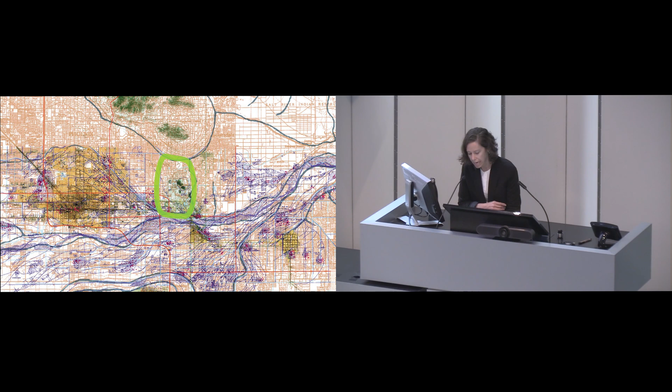So we took a look at what these words might mean. We really didn't want this to be our initials. We wanted to be something bigger, something that really talked about having a collaborative practice, which is what we believed in and what we still believe in completely.

So we found this amazing word, ma. It's a Japanese term, and of course one syllable, and yet it means an incredible concept. It's essentially the spatial idea of wabi-sabi.

So it's this idea of negative space or experiential space. It's kind of the counter to the formation of Rome, where you have obelisks that have created a city. Ed Bacon talks about that a lot. It's more like an Eastern idea where you have negative space, and moving through that negative space, or the space between, is what ma means. So again, a very complex idea in one syllable.

That is Japan, and we hope to make a pilgrimage there soon eventually. We haven't done it yet. But that's where Studio Ma comes from, because we are very concerned about negative space, experiential space, and it also happens to be somewhat feminine, which I also like.

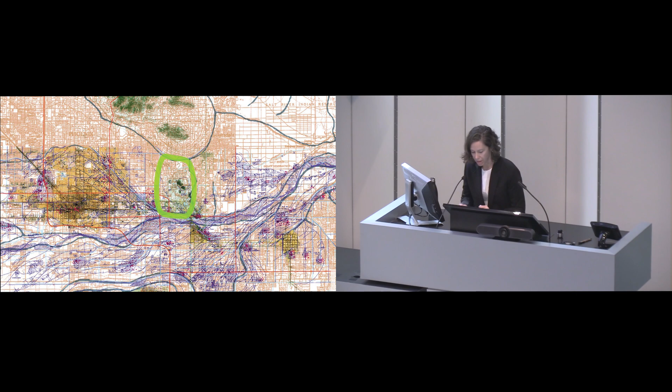So I want to give you a little bit of background about the project we did here. Some of these canals are used to this day as part of the modern conveyance of water. That inner loop connects three cities, and that's how we get our water. We created a trail out of these loops, and that was the design problem.

We quickly became inspired by the incredible adaptation of nature in the face of extreme heat and drought. We choose to live in Phoenix because we're deeply inspired by this place of extreme heat and drought, which honestly, a lot of places are going to be like Phoenix in the coming decades and centuries. Being here in the middle of drought and heat and urban concentration, but also resilience and regeneration, from water recycling strategies to inspiration from desert flora, gives us a really remarkable lens through which we see not only the rest of our practice, but the world.

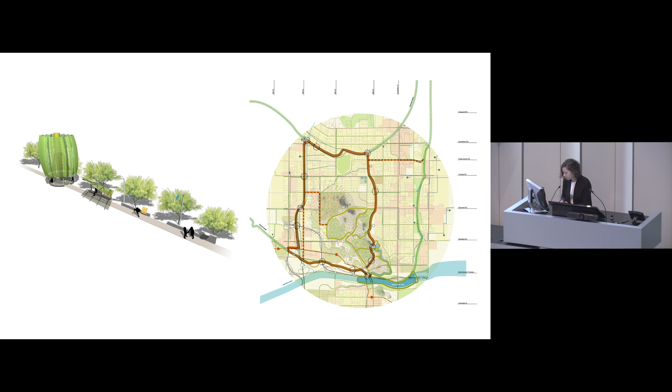And here's our studio, where it all happens. My philosophy is one of generosity and responsibility. I feel tremendously inspired by people and places in nature, and I believe we have an obligation as people living on this planet, and as architects, to act positively upon nature, to become an explicit part of a regenerative ecosystem instead of taking.

That belief has led us to develop a set of core values for how we approach design over the last 20 years. We formalized them in various ways, but briefly they are sustainability at any scale, leadership through partnership, and advocacy and value for all. This means we want to think about sustainability not only in terms of design, but construction, and that usually means doing a lot more with a lot less, and also always being aware of our impact on natural systems and ecologies.

We believe that architecture should be accessible to everyone, and so with every building we look for ways to engage and connect it with a wider public, even if it's a private or small semi-private structure. We believe that the best leadership comes not from one person taking charge, but from a deep partnership with experts in multiple fields. We learn from our clients, and they learn from us. We learn from each other, and we learn from scientists and engineers and other experts.

And most fundamental to our practice is an optimism. I'm sure you hear all about being optimistic, and people might tell you to be optimistic, and then you read the news, and well, it's difficult to be optimistic, so don't read the news.

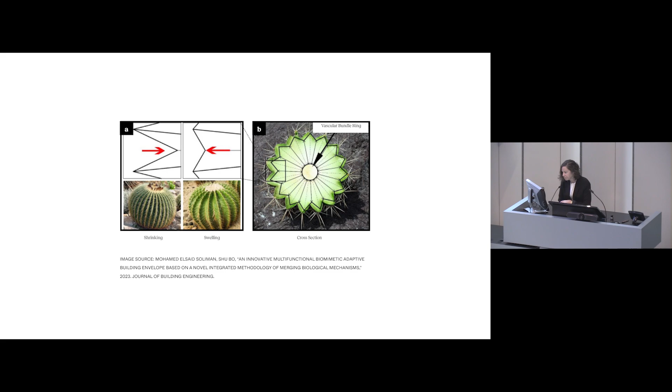We design the space to naturally ventilate for 7 to 8 months of the year, and to include a biome, a space between the enclosure of the building and the carbonized wood screen that's planted with low water and low light plants, stepping down the ambient temperature between the hot desert air and our indoor comfort zone. With our photovoltaics, it operates at nearly net zero energy. Our goal is to get to net positive energy and water.

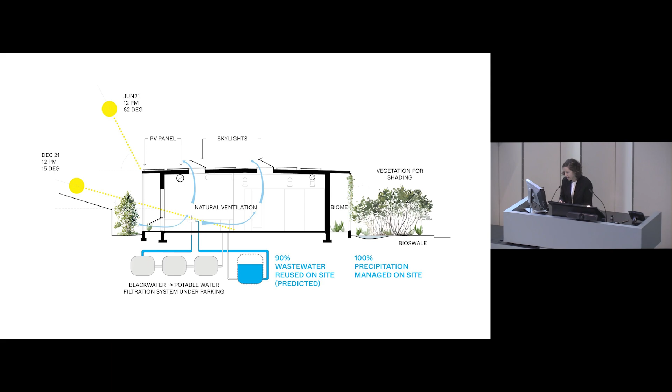It's definitely a journey, especially in the desert, and we quickly discovered the complexity of our water cycle in Phoenix. So we initially sought to have an on-site water recycling treatment that went from black water to potable, integrated into our facility, and we quickly learned that this wasn't helpful after we educated ourselves about what the actual water cycle is in our city. And this is it—you can see that one simple question, where does your water come from and where is it going, can lead to very complex answers.

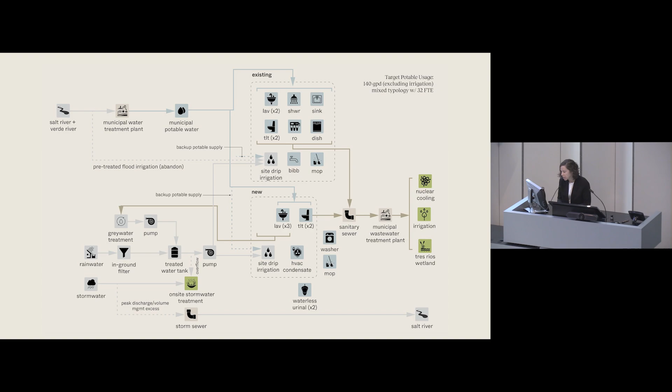For us in Phoenix, this involves that ancient canal system dating back 4,000 years in some parts, the geomorphology of the state of Arizona, and a wastewater treatment facility that's operated continuously since 1940 and provides all the cooling water needed for the only desert nuclear power plant in the US. So it's complicated, and the more we understand about these systems, the more we can educate ourselves and our clients to make more ecologically sound and positively impactful design decisions.

So we moved our office into this building in 2017 when we were working on a project for Arizona State University called Fusion on First, which I'll get to. I remember the first time we had someone in the office and the thrill we felt showing them how principles of shade and our desert biome, while simple, can be so effective.

By the time we moved into our office, we had finished several major projects, the first of which, ASU's Memorial Student Union—I won't spend too much time on it, but it was our first big project. We finished it from initial meeting through design and construction and completion in 164 days. Yes, 164 days. It was 100,000 square feet, over $50 million in today's construction dollars, and in a way, we were kind of ambulance chasers, more like fire truck chasers.

So the plaza you see on the left was what we were working on, and a terrible fire broke out in one of the rooms in the union—it was actually a smoker who was, I think, hanging out in the chair storage room, and I swear we had absolutely nothing to do with it.

But horrible fire. This is the center of all kinds of hubs of activity. 35,000 people go to this union every single day, and it needed to be put back and rebuilt as quickly as possible. It also had a host of code violations, including lacking about 50 feet in exiting width from assembly spaces on the second floor.

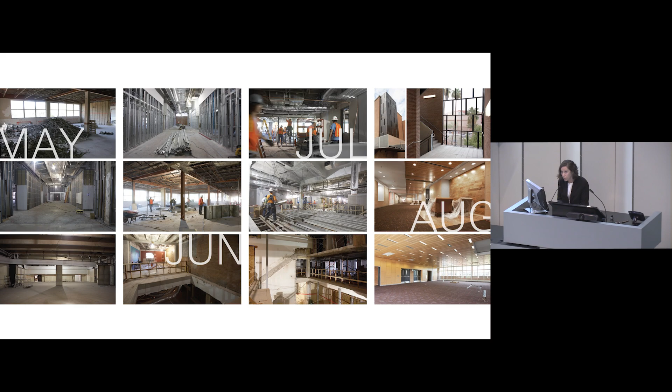And it set the tone for our office going forward. We're people who will work incredibly hard to get incredibly complicated things done. And we also care about joy.

I know that joy is a tricky topic, and particularly presently. It's hard in many ways to think about the role of architecture in creating joy. But if you think about buildings that are really incredible, and I was personally very influenced by the work of Sverre Fehn, whose Nordic Pavilion is, when Chris and I studied in Norway, this is what this is, and they

And getting to that joyful end product isn't always going to be joyful on the way. Getting your designs to be constructed properly is very hard. Reaching consensus can get tricky. Figuring out how to ameliorate existing social inequities is very difficult.

But we're committed to approaching architecture through the lens of ultimately creating something joyful. And this challenge excites us. And honestly, when you have a purpose and you have your why, hard work is joyful.

At NAU, Northern Arizona University, or as they like to call it, Native American University, for instance, we partnered with a Pueblo planner, Ted Jojola, to engage students from 64 Native American tribes so that we could learn about the difficult, complicated, and yet still joyful and resilient history of Native Americans, to see how our student center could actually improve their existing experiences on campus.

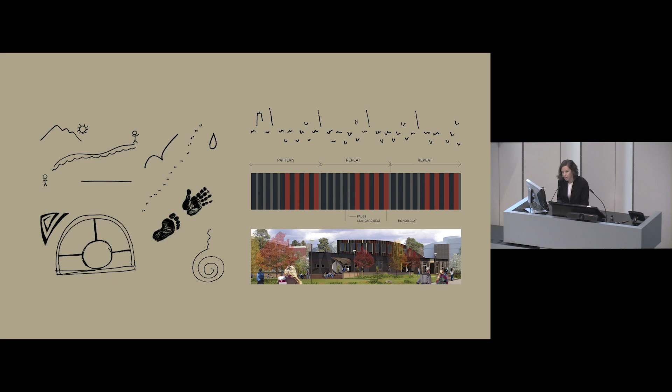And these students, we went through charrettes, and they told us about their stories. It was actually all around this idea of migration, beautiful stories, difficult stories, visual stories. And these students were often culturally alienated and removed from their community on campus and their cultural practices.

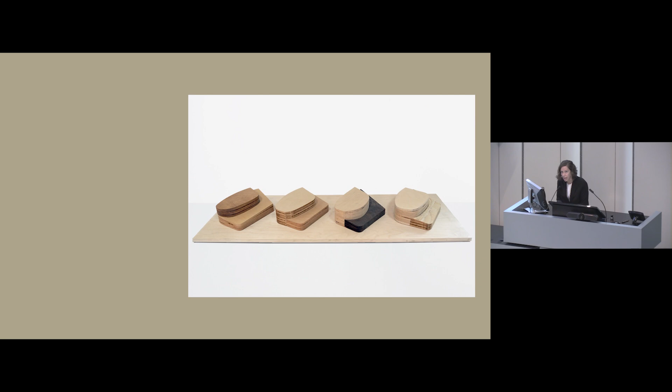So together, we designed and co-designed with them a center that they feel is completely theirs, 64 different tribes who feel like this is their space. And we believe that every building should improve what's already there.

We've also created consensus at big institutions like Princeton University. And there we designed a graduate student housing to help them build community and feel more connected to each other and the campus, which came from a lot of thinking about groups of people, in this case graduate students, who are not simple, homogeneous groups, but it's a community of people with very different needs.

There are families, there are couples, there are people who have actual mobility, there are people who do not have mobility. There are all kinds of different people in that group of graduate students. And we designed a place where all groups of these students could find a place to belong and find community together, regardless of their stage in life and family situation.

Places to cook, places to convene, places to belong together. And in this process, we also restored the natural flows of water from campus to its wetlands and lake.

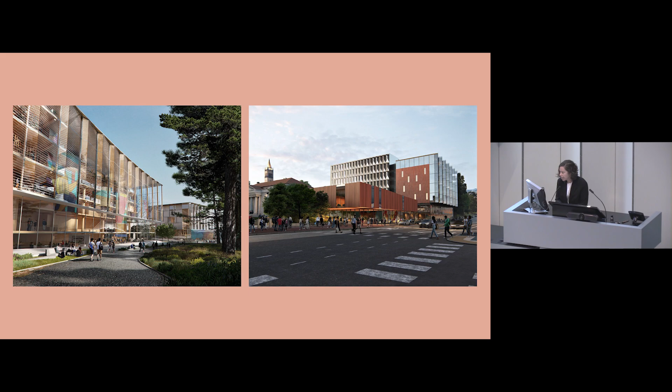At UC Berkeley, we're working on a huge student life and space equity plan that seeks to redistribute resources to meet the needs of diverse students, and that creates a place where students can convene, create community, and have a home base on an expanding campus.

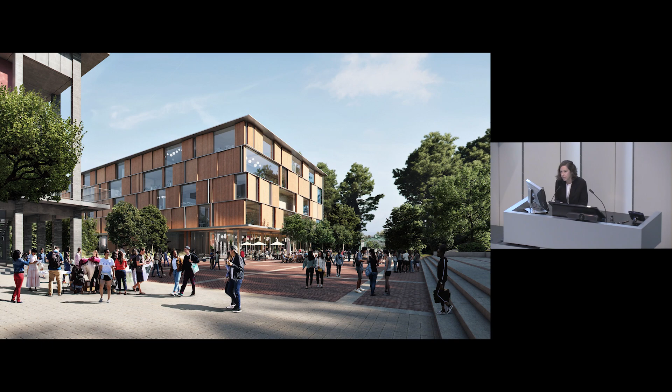And we share with our clients and partners a sense of optimism, this idea that you can actually have institutional visions that include everyone at the table.

This project in particular, which was run by their university architect, while they did a master plan, they acknowledged that a lot of people weren't at the table. And so this plan arose out of that, and the idea that they could meet with all of the different people, especially those that are student-facing, and students themselves, to make sure that this plan reflected their needs.

So this is the work we do, and we really provide people with a sense of optimism and reassurance, which we hope brings them joy. And now to those questions and lessons that we've learned from the desert that I promised.

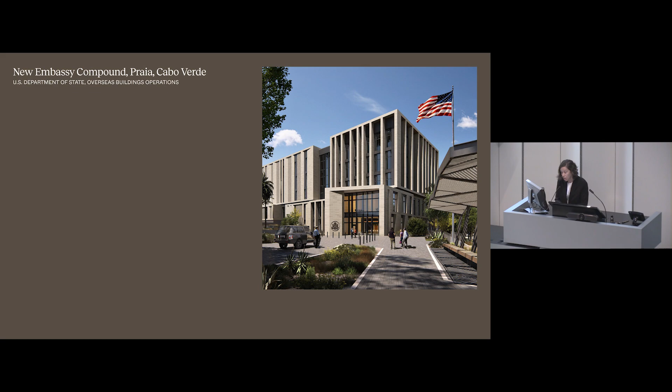So where does water come from and where is it going? This is our new embassy compound in Praia, Cabo Verde. This is the project where we heard about Cesaria and learned about the quintal. It also asked us to think about water in a way we'd never thought about before.

99% of the time, Praia is in a drought state. The city is on the leeward side of the chain of islands that make up Cabo Verde, and it's very, very dry. That dryness is something we're used to working with in Phoenix, and it's probably one of the reasons we were selected for the project.

A dry climate sets up a certain architectural approach. We need to think about how to make the most out of every drop of water. That means here in Praia, fully recycling all of our wastewater. We use every drop of condensate produced by the building's mechanical systems, which, although we're in a temperate climate, we need due to necessary security issues.

But here's where it gets sticky. Once a year, it floods in Praia. And so we found ourselves designing for these two polar extremes: total drought and epic flood.

The new embassy compound, or NEC as it's called — there are a lot of acronyms in the State Department — is sited in a neighborhood known as Várzea, or floodplain, which meant we needed to design for extreme heat and drought, a highly corrosive marine environment, and the potentially intrusive presence of floodwater.

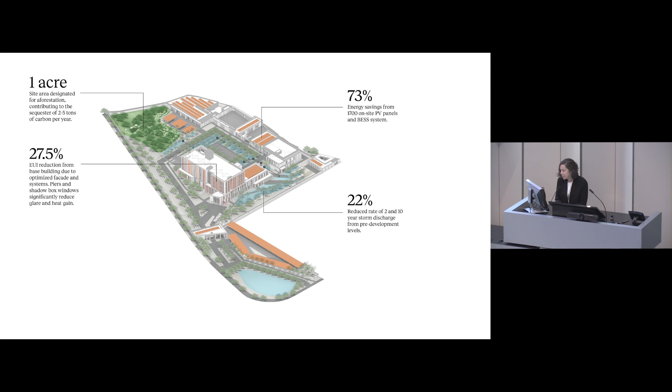So we designed the entire site around the central quintal gathering space, using this space and the sequence of spaces around it to slow down, convey, and collect water across the site, which includes more than 20 meters of grade change from its highest point in the upper left-hand corner to its lowest point on the bottom right. It became essential to the design.

All of the buildings that make up the embassy are related volumes organized in plan around this quintal space. The open end of the quintal is actually a place where nature engages with it.

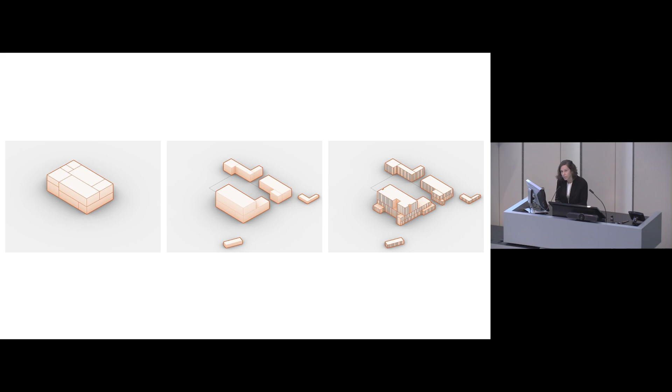The volumes are also stacked like stones of varying depths and heights vertically around this quintal, adjusting in height depending on the program and context. One of the things we heard when we interviewed local staff was about what made Cabo Verde feel like Cabo Verde, and they talked about stone quite a lot — in particular basalt and also a light, white stone. The two stones in combination really identified a place as Cabo Verdean.

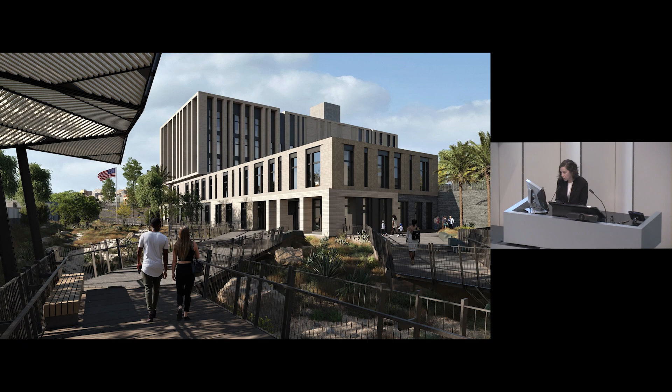Some of these volumes, like at this entrance where the public comes to get their visas, are scaled to address the adjacent residential neighborhoods. But as you move through into the lower areas of the embassy, the volumes begin stacking, and the ground plane is designed to completely flood.

You can see here the Quintal volume, made of basalt, on the right-hand side, which is 5 meters above this entry area. So you emerge up to this Quintal space.

This whole ground plane is designed to flood, as I mentioned. The walkways are designed like docks to anticipate this event. The areas highest in elevation are reforested to slow down the progression of floodwater to the Quintal.

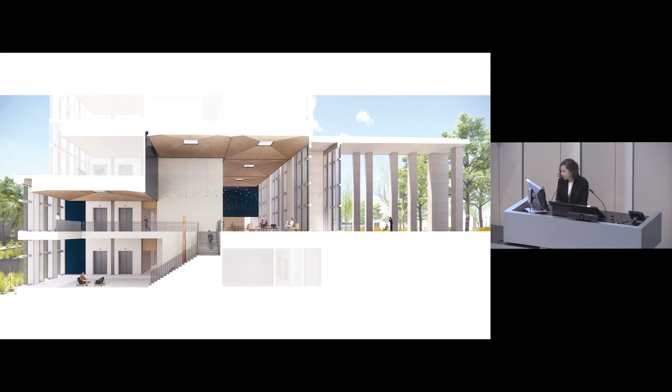The main embassy building connects the lower flooding areas of the site to the elevation of the Quintal, 5 meters above the lower entrances. The Quintal expresses itself as a basalt volume in the main public gallery of the embassy through a stair and a double height space, linking the diplomatic public spaces to the shaded outdoor spaces. This is a view from the reforested area of the site to the Quintal.

From the outset, the idea of this Quintal was a place to gather and make music, and we had these ideas of inspiration around music alongside the climatological challenges involved in designing this central space. We wanted to express the musical traditions of Cabo Verde directly into the fabric of the facade, and ended up taking inspiration from the syncopation of the Cabo Verdean batuque beat.

This is a music of liberation performed traditionally by women, and also Madonna. There's a version, you should check it out, it's very good.

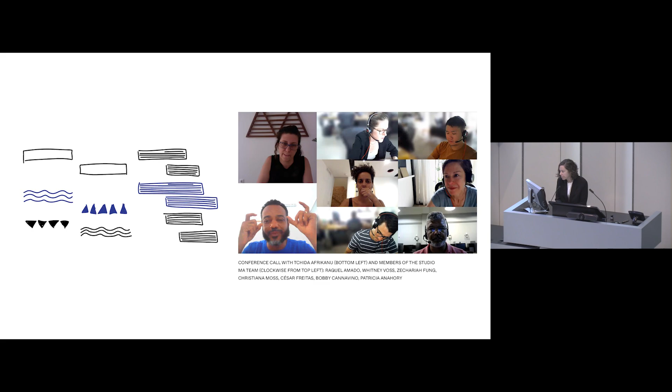And we formalized it into the facades. We worked with our local team, including Patricia Anahory, and brought a Cabo Verdean musicologist into the team named Tchida Afrikanu.

He helped us translate the beat in score, and we worked with this translation to create a syncopated rhythm of the facade. We felt like literally interpolating something so important to the culture of Cabo Verde and the staff and the general public, and interpolating this into the building was a way of honoring its place.

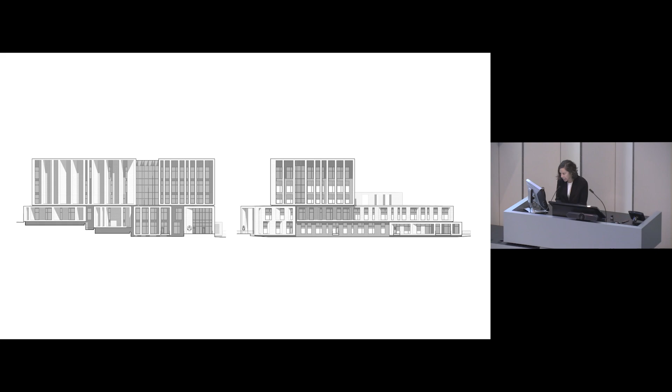The shadows and shades of texture that happen—the sun is very, very high in the sky in Cabo Verde, it's pretty much equatorial. Those shadows cast on the stone create all kinds of movement throughout the day, and the light and shadow will be dynamically changing. Here you can see how that syncopation plays out on the facade, and the massing as well.

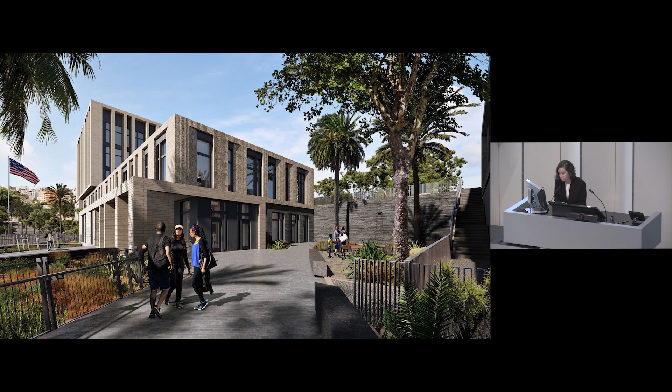The proportion of those openings, integrating stormwater and bioswales to capture water across the entire campus, and collecting condensate and storing water and conveying that water throughout the embassy is also happening here. This entire landscape is designed to flood for that once-a-year flooding event. We also tried to create a sense of walkways floating when it floods, surrounded by water—dramatic and evocative of the marine environment, and also very high-performing, making the most out of the water we can reuse and capture during these flood events.

This is the diplomatic entrance. So much of what we wanted to consider was the flow of water from the standpoint of resiliency and regenerative sustainability, which is central to our practice. We didn't want to just get rid of this extra water or engineer it away, put it in tanks, which happens so often, but we wanted to incorporate this natural flow into the embassy and the landscape and communicate this to the visitors, the Cabo Verdean government, and the general public, so that bioswales, rain gardens, and designing urban landscaped areas to not only withstand but actively embrace flooding became part of really being a good steward and ultimately a good diplomatic partner.

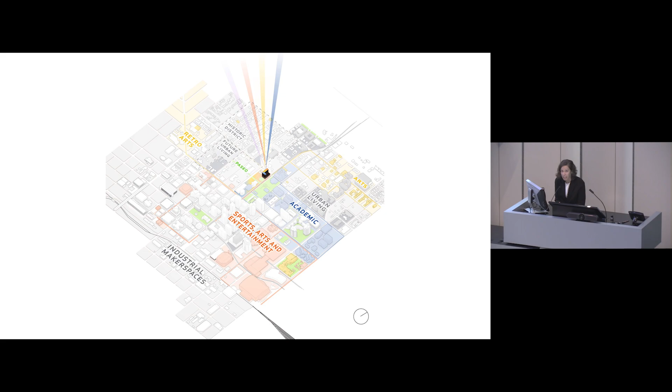So this is an educational housing mixed-use project. It's built in partnership with both ASU and the City of Phoenix, and it holds new fashion and popular music departments that are meant to attract students to a downtown with a growing art scene. There are a bunch of clubs nearby, there are a lot of artists, and the students are really embedded in a wonderful place downtown to create.

We, of course, wanted natural light on the interior where we needed it, and especially in the fashion studio areas where there's a lot of sewing and very fine embroidery happening. So you have these studios that have that natural light need, and then the music studios were essentially black boxes. So it was a beautiful way to organize the floor plate.

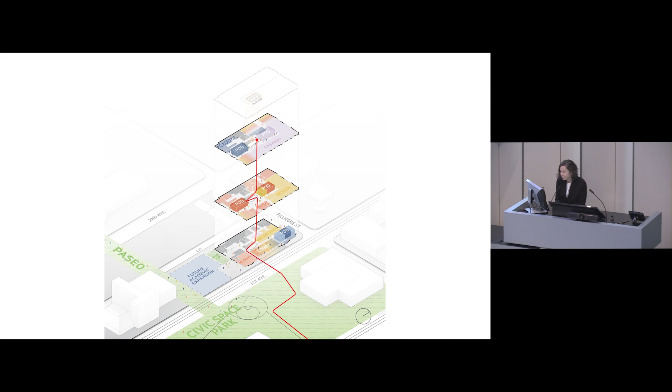We put the black boxes around the west facade, which is the most difficult to cool. Based on our orientation, unfortunately, we didn't have a whole lot of exposure on the south, which is where you really want to control the sun. We did have exposure, however, on the east, so the main orientation of the site really put those primary facade exposures on the east.

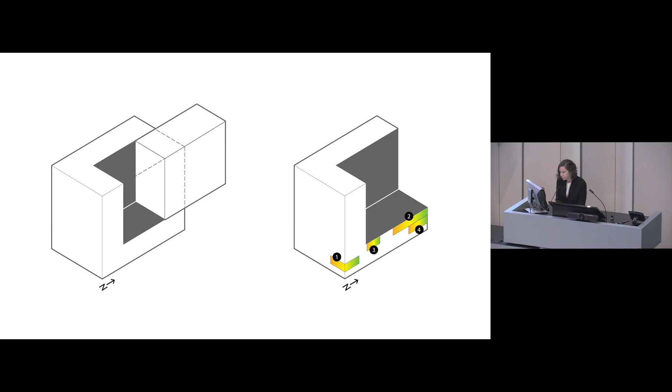So we quickly began to study the overall massing and found that the more we oriented exposures to the northeast, the less energy was used and the more we were able to control glare. We continued to look at how to optimize the facade to maximize diffuse natural light and minimize solar radiation using a software program called Climate Studio. We work directly with Timur Dogan - we are actually at Studio Ma, one of the firms that beta tests the software they're developing at Solemma. So it's good stuff and it works really well.

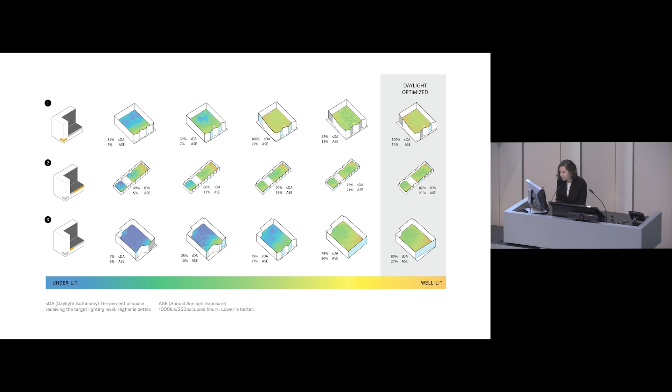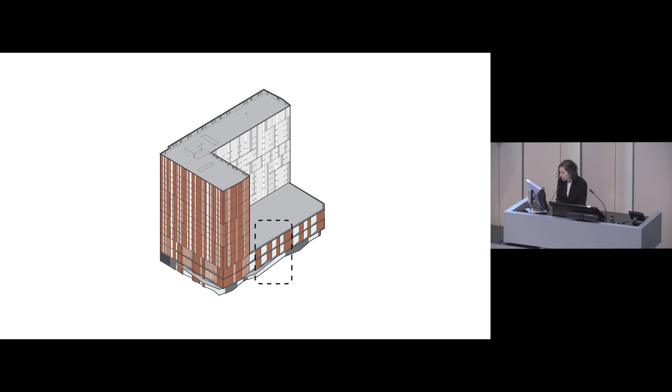And this led us to a facade design that uses crenellations and facets, very similar to the saguaro cactus that I had mentioned earlier. It screens any of that direct transparency, and focuses it on the northeast to reduce that heat gain. The facade's crenellations and screens are composed of lightweight, ultra-high performance concrete, UHPC, which also doesn't re-radiate, so the lower 3 floors really will help cool the perimeter of what's around it. It's framed within self-shading overhangs and layered over that glazing.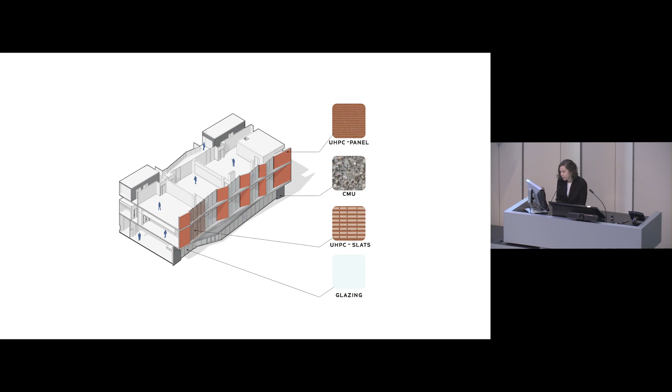All of these strategies are centered around celebrating and managing the sun, and you have to know exactly where it's going to be and when in order to do this well. So we use that shade glazing in the most efficient way.

And I have to just say, architects really do need to go on a glass diet. If you may remember, maybe 7 years ago or so, Michelle Obama came out with this idea of my plate - it was like a diet, right? You were supposed to eat about half your plate vegetables, a quarter protein, 25% carbohydrates, and maybe 5% would end up being sweets. So glazing is essentially the starchy stuff and the desserts. Glass is like that, right? We all kind of crave the sweet stuff, but it's really not good for us.

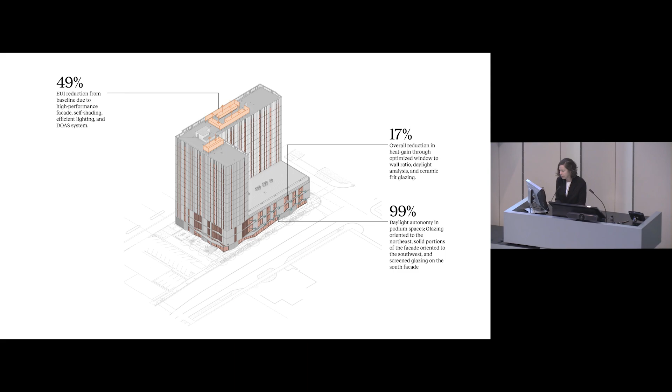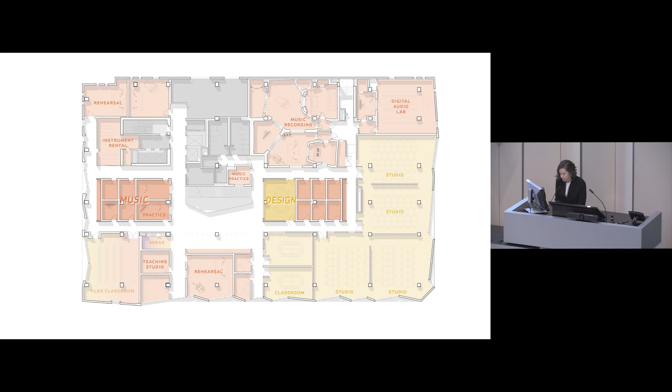Ultimately, the self-shading strategies we used to optimize glass and reduce solar heat gain resulted in a very high-performing building. All the ground-level public spaces, studios, and classrooms have access to controlled and diffused natural light. The music studios are placed in the back area, as I mentioned, so there's a really nice area that doesn't require daylight on the west. And the studios have optimized daylighting to all of them without glare.

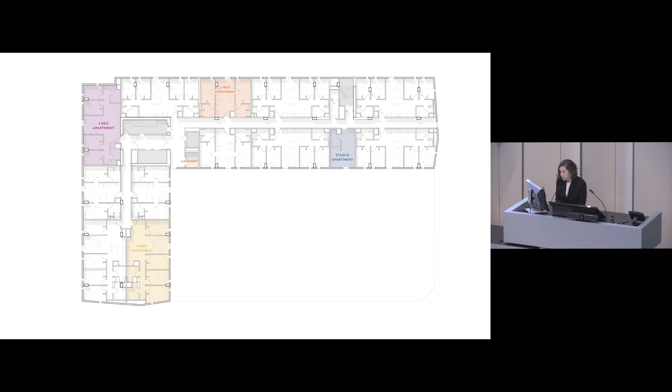And this is a kind of space that creative students love - that's the kind of space it produces. And also on the residential floor levels, we have an optimized amount of glass, which really you don't need a whole lot of, especially in the desert. The residential floors are minimal, but appropriate.

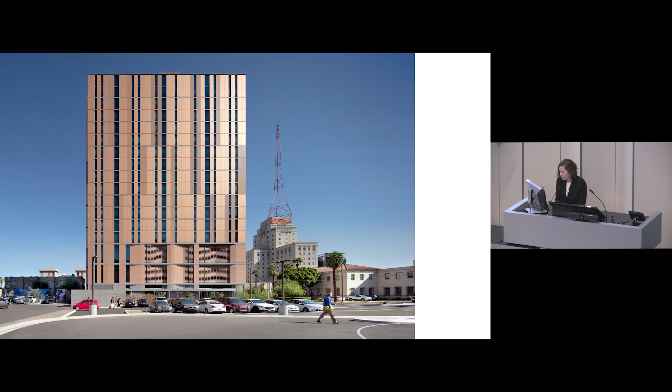But using the building mass to self-shade created other opportunities for diffused daylight, like the stair that connects all 3 floors. You can see this kind of light that dances around in the cutout, which is lightly colored so that sun or the indirect lighting can actually penetrate this without adding to that direct solar heat gain. So we've learned from the desert that a little glass goes a long way, and doing everything we can to reduce our window-to-wall ratio saves cost, reduces heat gain, glare, and bird strikes.

Back to the diet analogy, when you start to learn that maybe cupcakes, as I mentioned, are like glass—kind of the bad stuff because you can only get about an R of 5 or so eventually out of glass, even super high-performing glass. So if you think about it, cupcakes, while they look very pretty, once you know what they're doing to your insides, you tend to not want to see them anymore. They don't necessarily look so good.

Broccoli starts looking really attractive. And so your eyes adjust to this—your eyes adjust to the fact that we're not relying on glass all the time. It's very hard for me personally, once your eyes adjust, to walk around a city like New York and see towers of all glass that seem to go to infinity. It hurts my heart.

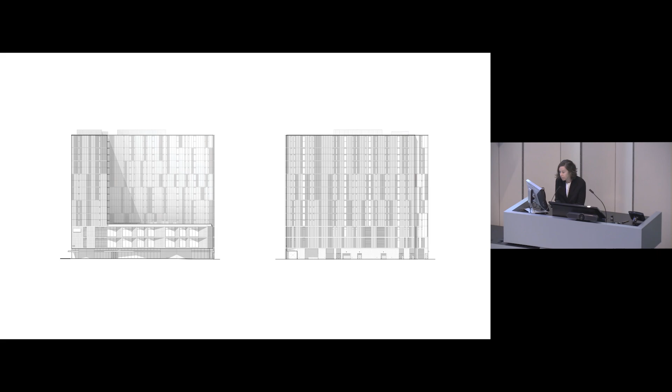We've learned from the desert that a little glass goes a long way, and doing everything we can to reduce that really does help. We can do that without compromising appropriate access to daylight, functionality, or beauty.

The facade design, along with the use of low-mass materials and the introduction of urban bioswales, reduces the heat island effect. Choosing to design to minimize the use of glass reduced direct heat gain by over 80%, and our self-shading facade design reduced heat gain by about 17%. This project opened in 2020 and has been considered a great success.

So our next question: how do we have a positive ecological and social impact on a site?

At Scottsdale's Museum of the West, this project allowed us to really think about what the West and what a museum about the West means to us. We're lovers of the West, of the desert, and Arizona, so this was a very provocative question. The goal of the museum's director and board was to have a museum where the Old West meets the New West. The West being, in many ways, culturally and historically codified, and constantly changing—but we wanted to have a positive impact on the site and introduce the public to an experience that put them in touch with the qualities of the West, restoring a connection to this epic natural landscape within an urban context.

The site is adjacent to Old Town Scottsdale, which is a remnant and somewhat themed Western town, part of downtown. We wanted to connect the public to the more timeless qualities of this place, taking cues and lessons from Mesa Verde, the ancestral home of the Pueblos.

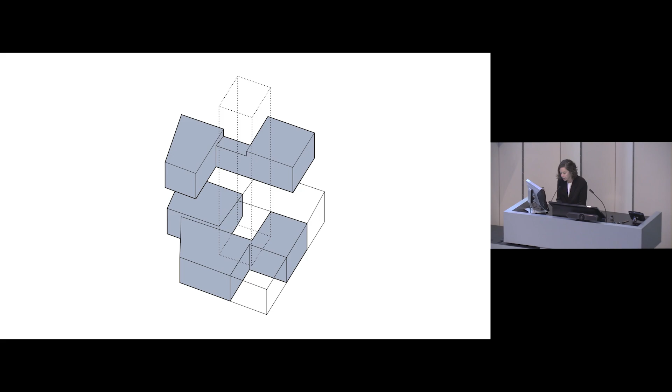There was also an idea of finding your own path, your own journey through the museum, which introduced this idea of spaces that rotate around a grounding element—in this case, a courtyard—and a place to connect your experience to the sky. The cardinal directions became the organizing design move, being very significant in terms of indigenous thinking in this area in particular.

The courtyard acts as the place to return to, and you find yourself in these various galleries moving through spaces. You can always locate yourself in reference to the sky and in reference to the courtyard.

The overhangs and cantilevers provide big moments of shade, all part of exploring that productive tension and encounter between Old West and New, between what exists and what's discovered.

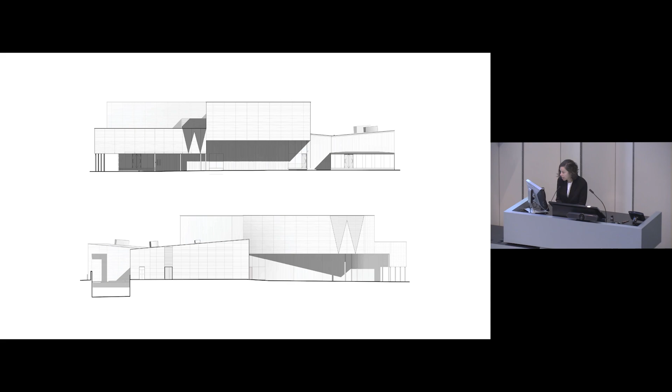Deep shadows and shade on the south actually protect and cool the masses below. We located the more massive materials, the tilt-up concrete, beneath these cantilever galleries, which shaded the entrances and plaza below. You can see how that plays out in these very dramatic shadows and shade that occur as you move around the building.

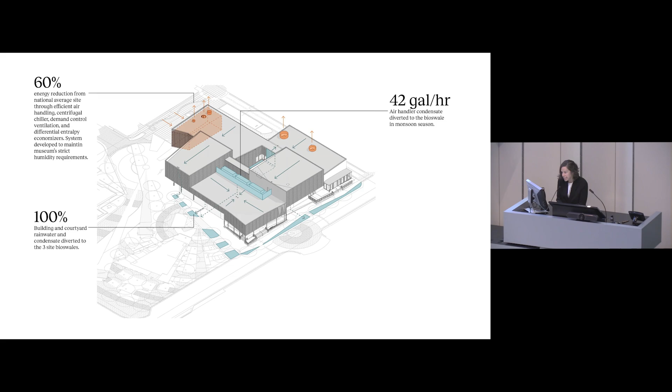So self-shading, and that idea of the New West meeting Old West, informed our formal and material moves—tilt-up concrete walls that are vertically self-shaded with deep ribs we exaggerated so they would crack naturally, and folded, undulated weathered metal that takes its inspiration from snake fences in the landscape to horizontally self-shade. The courtyard, along with the self-shading strategies, resulted in a very high-performing building that optimized daylighting and reduced energy.

And it invites the visitor to really think about where they are in space, to look up at the sky and orient themselves, relating back to this idea about where the sun is in the sky.

It also provides a way to exhibit water collection and conveyance. The condensate in the building and the roof drains divert and collect water across the courtyard, which is expressed on this weeping wall on the north face of the courtyard, the north being also culturally significant.

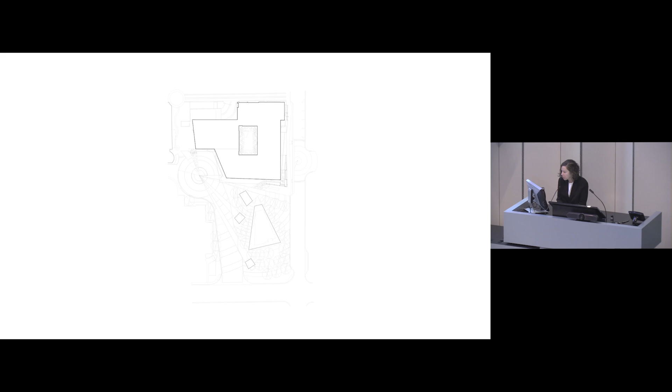Our architectural interventions are about creating visitor comfort, which also led to the larger public plaza surrounding the museum. Water from this weeping wall then gets diverted through runnels across the plaza and under the building, giving a new space in this plaza for trees and native plants to grow.

For inviting someone to see this relationship between water and shade, the museum then becomes the story of the West, a place to experience, not only to look at the actual programmed curatorial exhibits inside, but also to begin to have a relationship with its desert home, with the West, both in idea and reality.

And this happened to cost about 30% of the cost of most museums because it's constructed like big box shopping centers with tilt-up construction and steel metal joists. So there's no excuse.

The last idea that I want to talk about today is how we can produce or create more than we take. It's a stretch to think of a building as an energy, water, and ecological production machine, but that's how we think of every building's potential.

So this is the design of a new research building that's dedicated to answering this question. The home of Arizona State University's Global Institute of Sustainability, ISTB7 houses ASU's researchers who are focused on decarbonization.

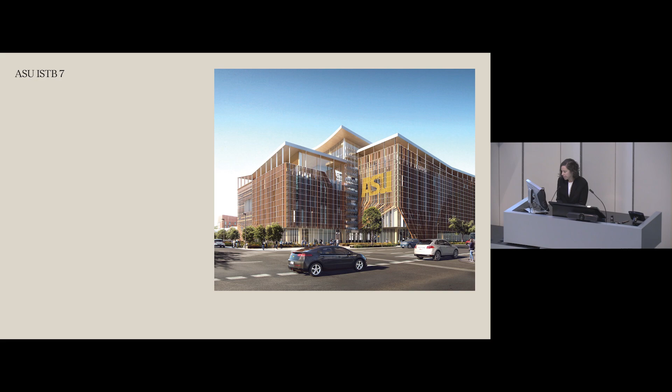So I walked you through some basic principles we used for our office, which we called the Zero Studio, by the way. And we've been grappling with this design problem from the beginning of our practice. And I'll walk you through this concept project, which has now become our North Star.

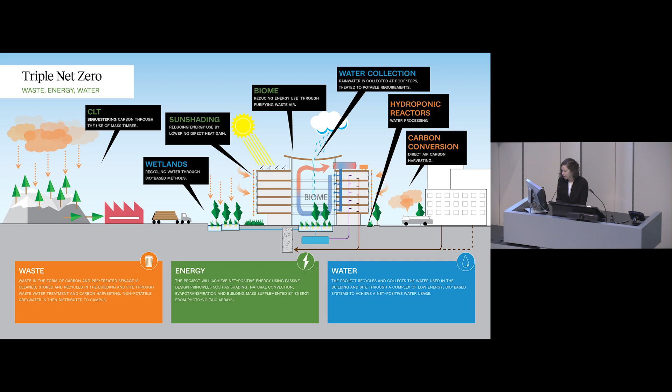Thinking in more of a closed-loop system means driving down energy use as much as possible, reducing embodied carbon of the materials that you're using, and recycling 100% of your water on site.

This has been done before. Attempts at a 100% closed-loop system at Biosphere 2 failed. But the principles, technologies, and concepts can all be utilized towards achieving closed-loop principles within an open-loop system, ideally by contributing more nutrients and oxygen to the planet.

Located at the far northeast corner of ASU's Tempe campus, this site had a light rail stop, one of those water-conveying canals that I've been talking about that crisscrosses the city, and the main sanitary sewer line for the entire campus, which actually needed to be enlarged. So all of the wonderful ingredients needed to propose some alternative thinking.

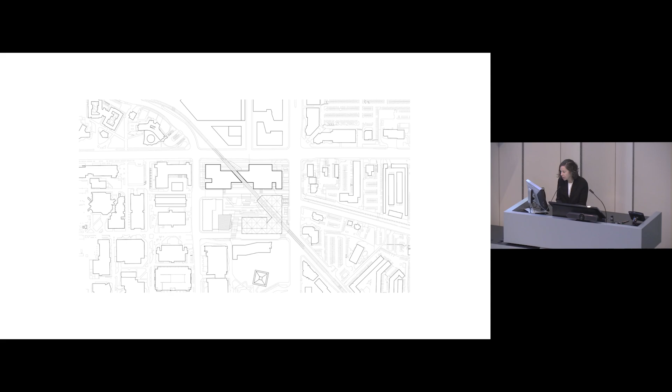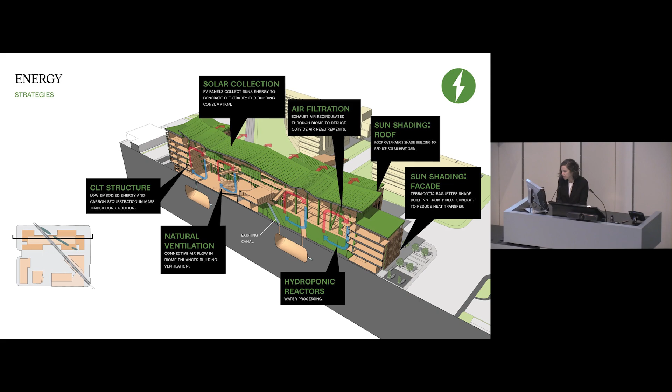Using the principles we've reviewed to reduce solar heat gain through self-shading, using natural ventilation, night flushing, and reducing air exchanges by pre-cooling air in semi-conditioned spaces, and cleaning returned air through green wall biofilters, this all reduces the amount of energy needed to offset with on-site photovoltaics.

And in this case, the total amount of photovoltaics needed are supported on the overall area of the site.

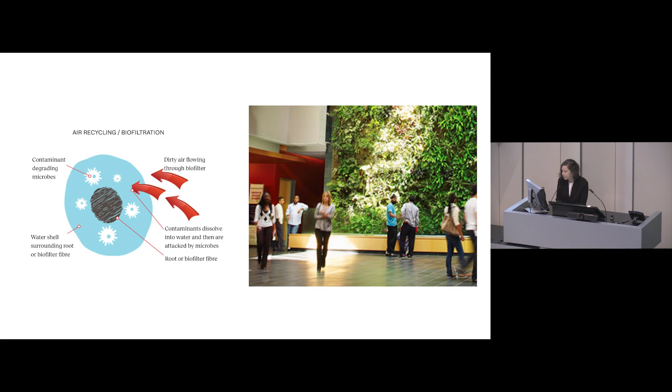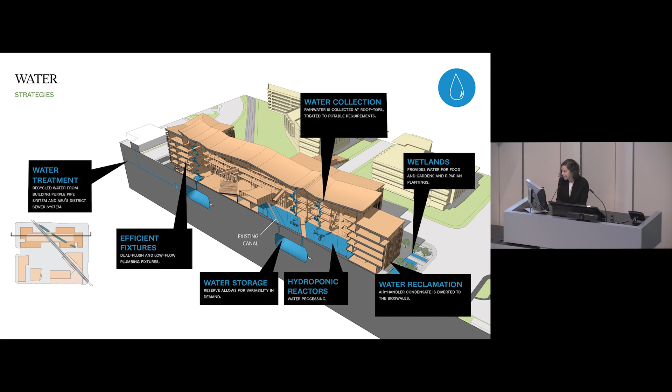Reducing as much potable water use as possible, and then collecting any rainwater and fully recycling 100% of all sanitary wastewater on site through a series of mechanical and biological treatment stages, including hydroponic reactors and wetlands that are brought directly into a central biome within the center of the facility.

These facilities actually exist at various scales around the country, including at Emory University, where wastewater is treated and then used to grow food in greenhouses.

In Phoenix, Arizona, we've been treating our wastewater to use to cool our nuclear power reactor, as I mentioned, but we'll soon be treating that water to fully potable.

Reducing embodied carbon through the use of cross-laminated timber will sequester carbon, while integrated direct air carbon capture can collect carbon, store it in the soil within the biome, and through the process of mineralization, use it to eventually make paving.

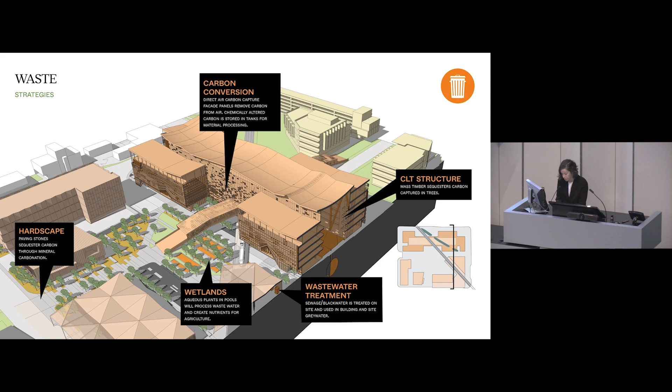This all sounds a little wild, but the technologies all exist. And the researcher Klaus Lackner, whose department is located in this building, is advancing carbon capture, passive and active technologies that can be incorporated into facades, reducing embodied carbon and sequestering and capturing as much as possible in the built environment.

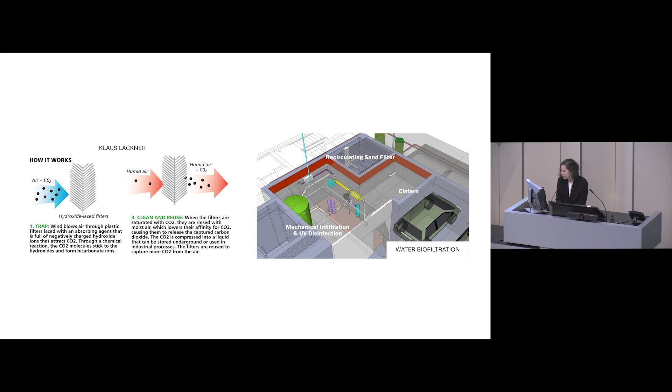Through these new technologies will likely increase the availability of new materials eventually, carbon sequestering paving and masonry and concrete, in addition to some wood and clay and soil-based materials that can also be very low carbon.

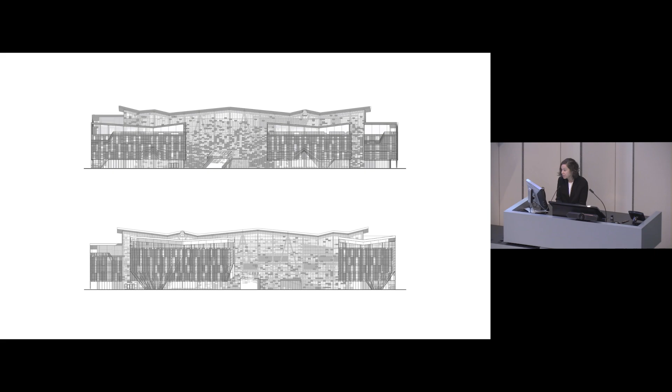So the design uses terracotta, CLT, and the roof forms allow both solar and water collection. Each facade is shaded, and the biome is envisioned as a semi-enclosed space that shades, collects water, and promotes air circulation.

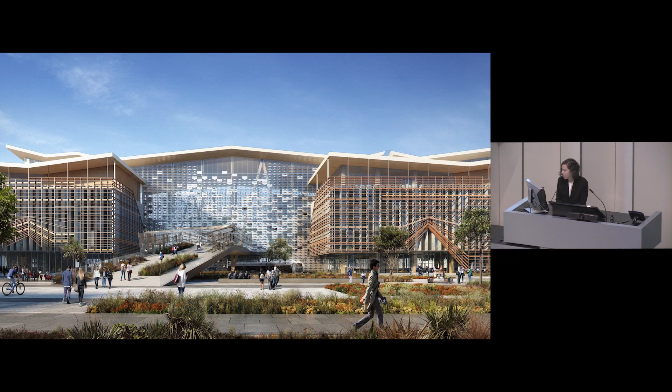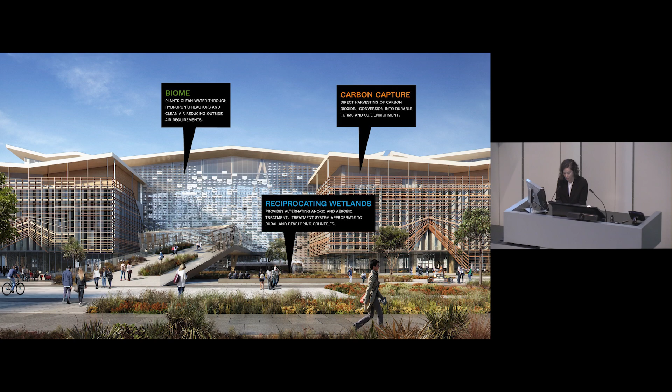Each facade is shaded, and the biome is envisioned as semi-enclosed space that shades, collects water, and promotes air circulation. You can see the different elements here: the biome, carbon capture directly on the facade, and reciprocating wetlands. The light rail happens to go directly through the building, which in reality didn't happen, unfortunately, because that was a pretty cool moment.

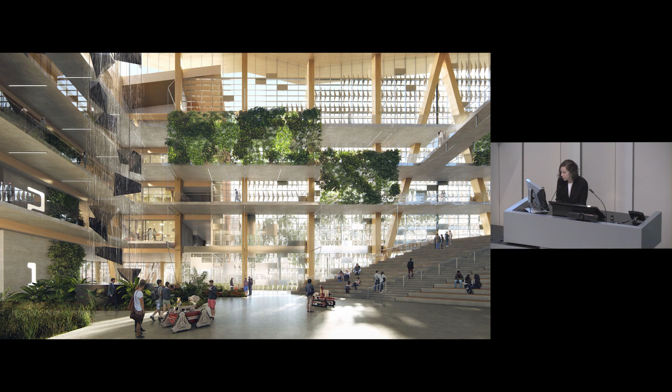So we're looking now at the interior of the building as a massive ecosystem. This is designed as a fully regenerative building that produces as much water as it uses, treats and recycles all of its own wastewater, and sequesters more carbon than it produces. Here you can see what this feels like, to be within a regenerative building environment that gives more than it takes.

We also had fun thinking about ways that AI could participate. Farming robots, swarming robots, maybe robots that can dynamically shade or produce energy. We can tell them what to do, by the way.

As architects, we can articulate the vision, lead teams, inspire, and design the decarbonized future. I believe we as architects are in the best position to do so, but we have to engage in it in order to lead. We must harness the tools and lead engineers and scientists and private capital and all kinds of capital and our clients towards this purpose.

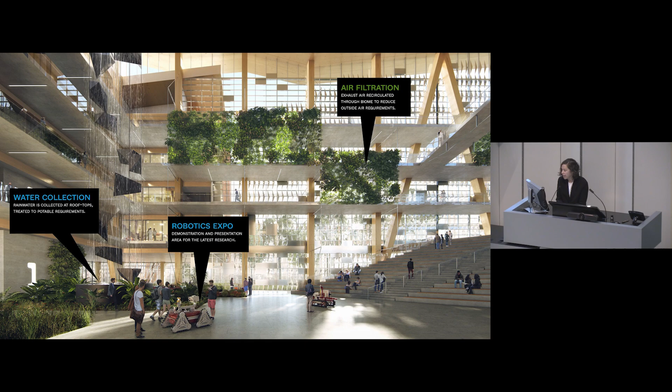So I want to leave you with this idea and belief that we all have the tools to improve the situation on our planet, and that these tools don't need to come at the expense of something else. So often I think we're given false binaries between cost effectiveness and sustainability, or between social justice and formal beauty. But in our practice, we believe that these are all interdependent, that a more sustainable building is one that's actually steeped in social justice, that it's ultimately more cost effective to do the right thing and build it better, and that architects have a tremendous responsibility, capability, and power to improve the planet.

And I hope that these projects have shown you what's possible and given you a sense of the range that not only Studio Ma has, but that all of us could have, and that you feel inspired to continue to rededicate yourself to using architecture to solve the world's problems. Thank you.

Thank you, Christiana. That was so inspiring. I'm not really sure what my question is, but it's something about Cornell. So you went to school here. I did. Thirty years ago, is that possible? I graduated 30 years ago, yeah. So you were a child prodigy. You're so incredibly sweet. Thank you. So you had some of the faculty.